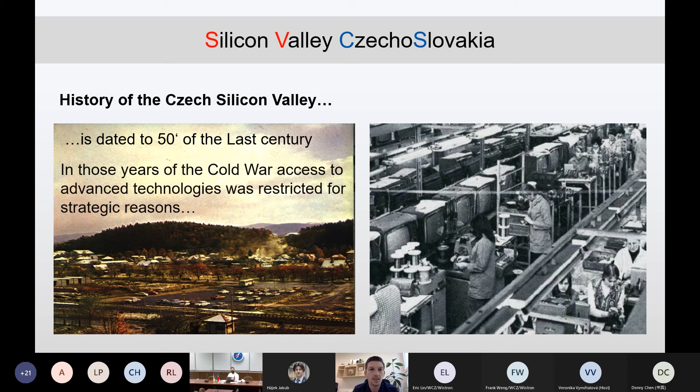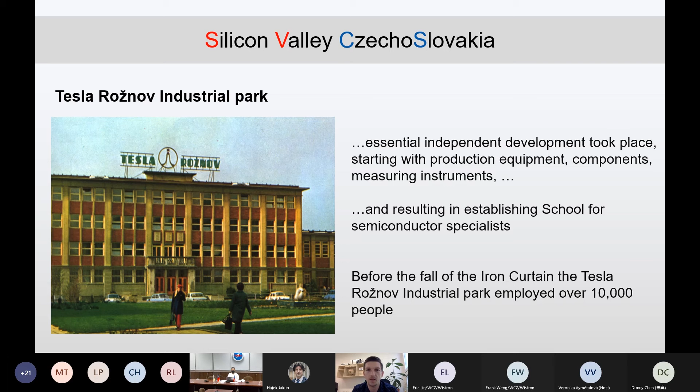History of this Czech Silicon Valley is dated down to the 50s of the last century. In those years of the Cold War, access to advanced technologies was restricted for strategic reasons. So essential independent development took place, starting with production equipment, components, measuring instruments, and resulting in establishing a school for semiconductor specialists. Before the fall of the Iron Curtain, the Tesla Rožnov Industrial Park employed over 10,000 people.

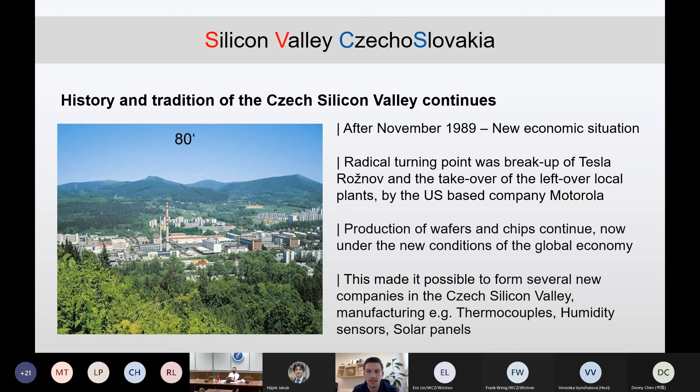History continues, now we are at the 80s. After November 1989, the new economic situation took place. A radical turning point was the breakup of Tesla Rožnov and the takeover of the leftover local plants by the US-based company Motorola. Production of wafers and chips could continue now under the new conditions of the global economy. This also made it possible to form several new companies in the Czech Silicon Valley, manufacturing thermocouples, humidity sensors, and solar panels.

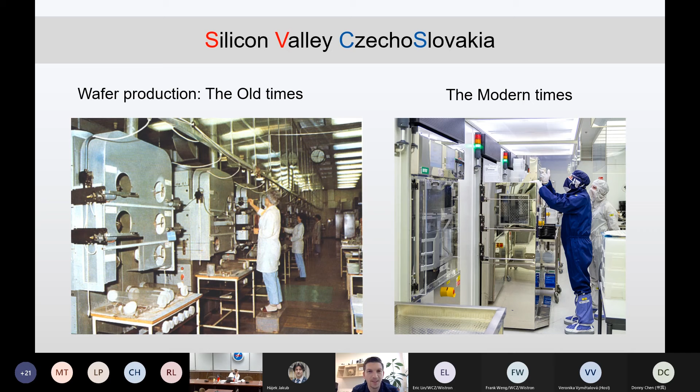Here you can see on the left an old picture from wafer production in the old times. You can see the staff didn't wear any spacesuit, but if you look to the right, the modern times, it's how we know it today.

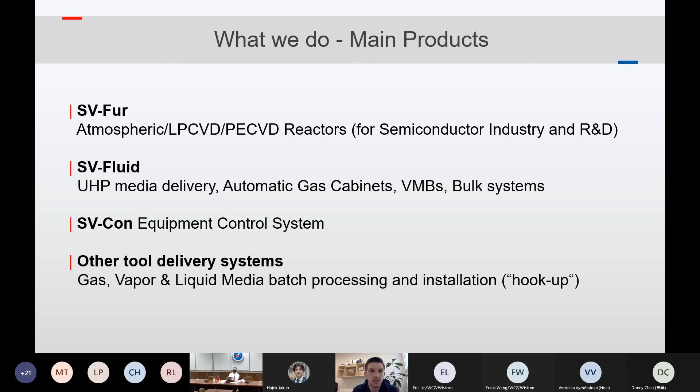So what do we do? We have 4 product lines. We have furnaces for atmospheric LPCVD and PECVD processes, we have ultra high purity media delivery systems, we have equipment control systems, and we also have so-called hookups.

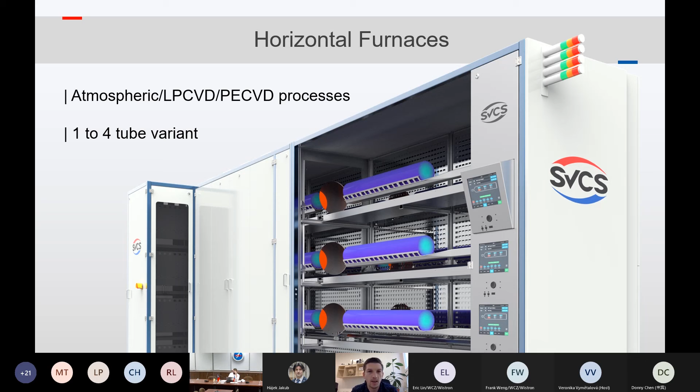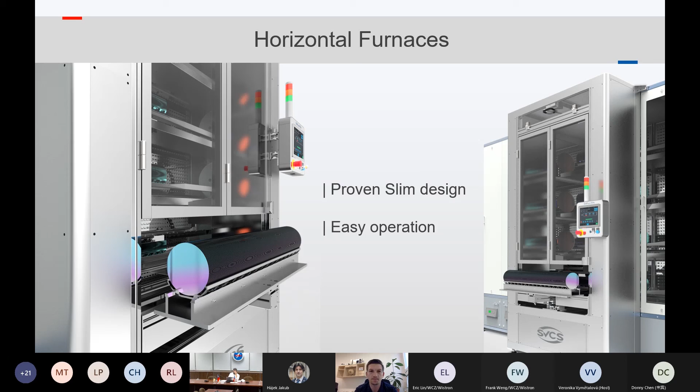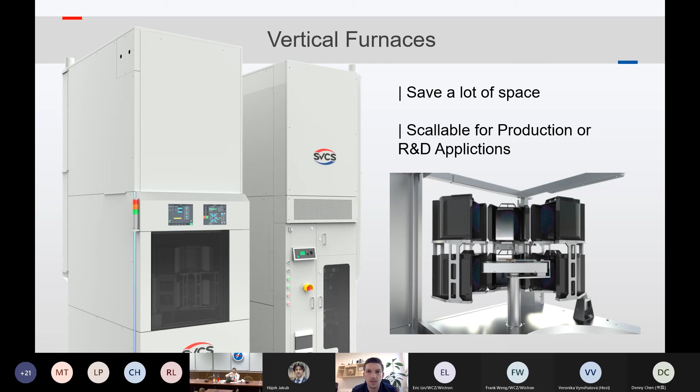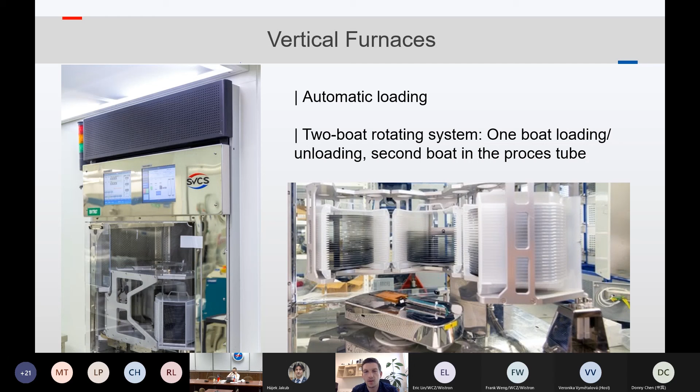Another product is the vertical furnace. Compared to horizontal, it saves a lot of space. It's scalable for production or R&D applications. For this furnace, we also have internal automatic loading, a so-called two-boat rotating system, so one boat can be loading or unloading while the second boat is in the process tube.

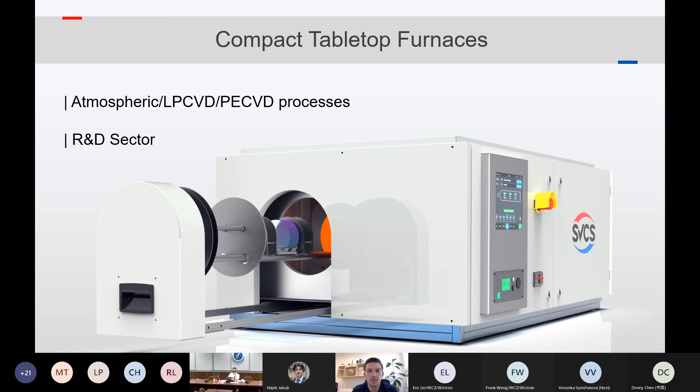The next product is a compact tabletop furnace. It's a small, unique, compact design, but keeps all the features of the grown-up furnace, for standard atmospheric LPCVD and PECVD processes. It's really suitable for the R&D sector.

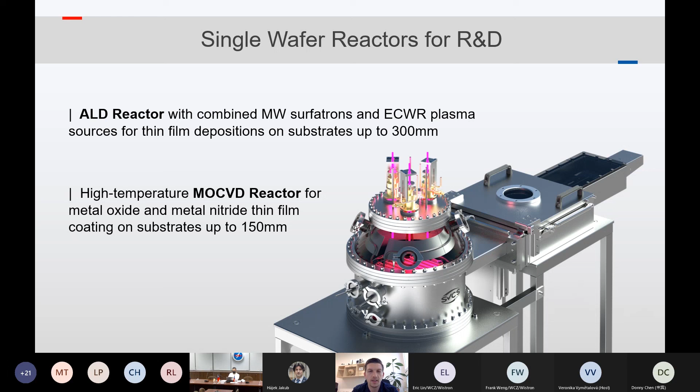And we stay in the R&D sector. For this sector, we also develop single wafer reactors, for example an atomic layer deposition reactor or a high temperature MOCVD reactor. We participate in many projects. Now we have an ongoing project for a Minimal Fab consortium. It's a Czech-Japan R&D project, and it's a construction and development of an ALD reactor for thin film depositions on 12.5 mm wafers.

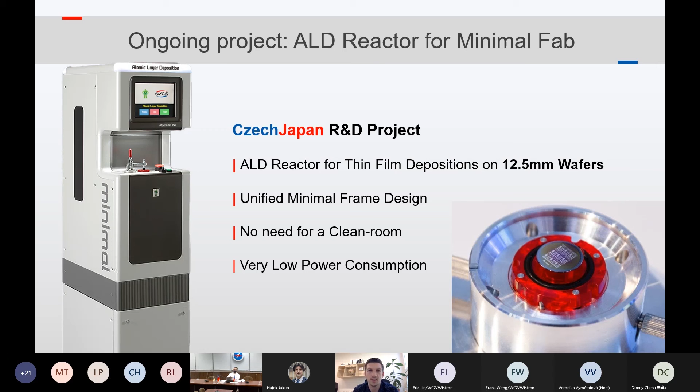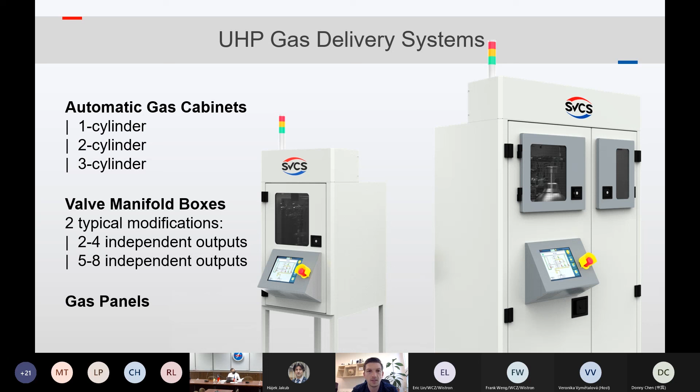Now we are getting to our ultra high purity gas delivery systems. We have automatic gas cabinets in 1, 2, 3 cylinder variants. We have valve manifold boxes with 2 typical modifications, and of course customized gas panels for various technologies.

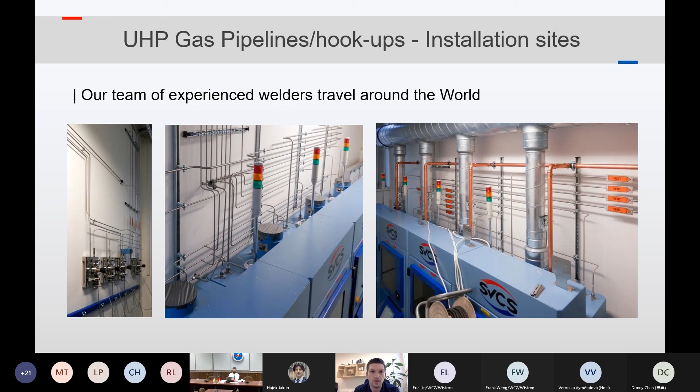Here I wanted to show you some of our hookups, so-called hookups. These are photos from installation sites. We have a team of well-experienced welders who travel around the world, and I will show you some pictures, for example from Lithuania, Kaunas; Poland, Krakow; Russia, Moscow; and finally France, Paris.

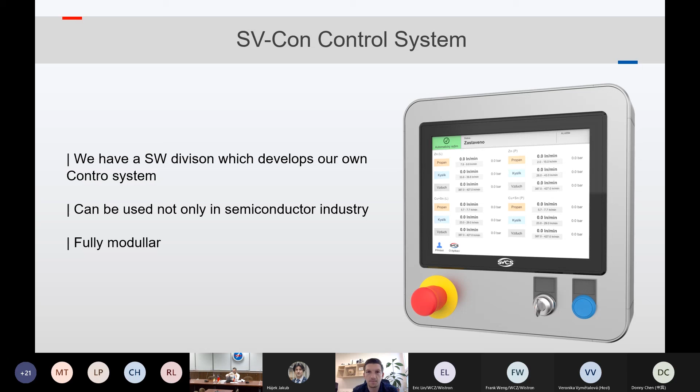And to summarize this, as you could see, we can provide not only furnaces, but also gas source systems and gas abatement systems, and of course hookups. So SVCS can deliver turnkey system solutions to your needs.